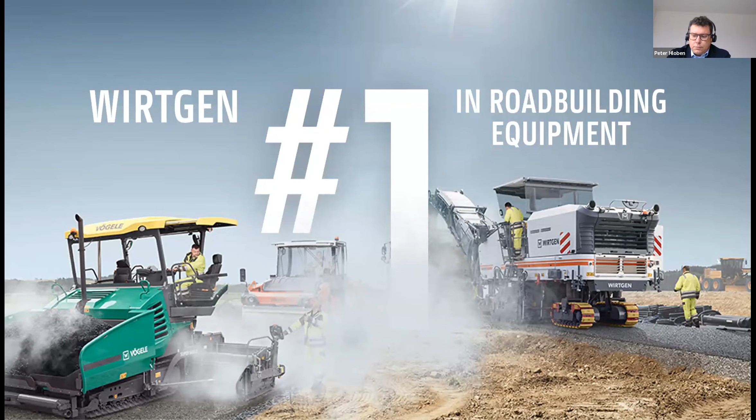We own the Wirtgen company with all 5 brands, like Vogele - this is road equipment. We are also an industry leader in construction equipment, including, as you can see, this loader here.

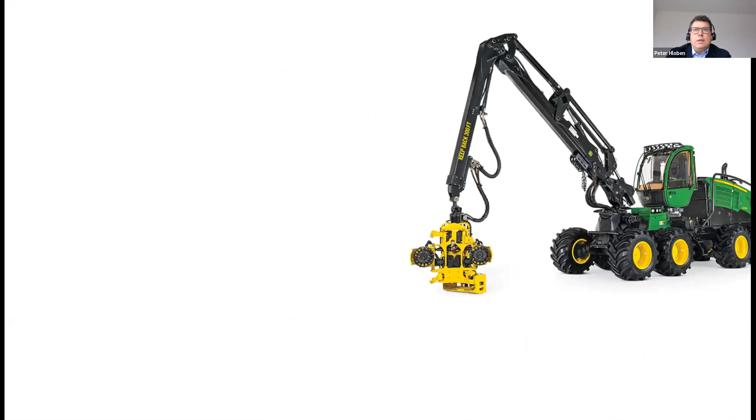We are number one in global forestry equipment. This is a forestry harvester.

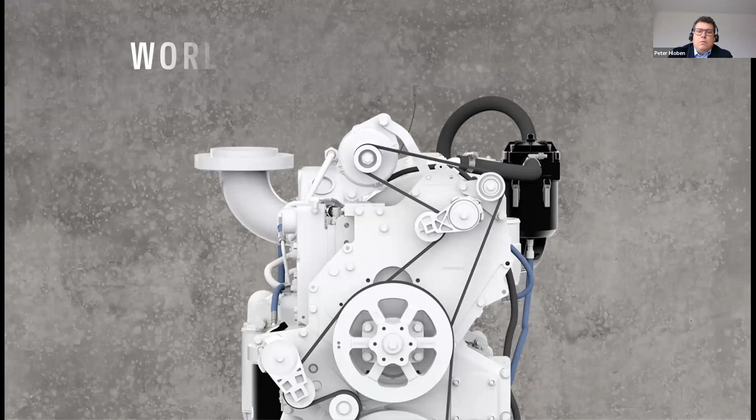We build some of the most reliable and fuel-efficient engines in the world. In fact, John Deere engines are in demand not just for agriculture and construction equipment, but also for marine, forestry, and other equipment around the world.

We are the official PGA Tour supplier with turf equipment, and we build 1 out of every 3 lawn tractors sold in the US.

You can see that we don't just build tractors - we have a very wide range of products. Now I would like to tell you about our operating model.

John Deere introduced a new strategy in 2020, very recently, which is split into three organizational platforms.

The first is production systems - this is how our customers get work done through a series of steps in their output, so that we can gain a deep understanding of customer production systems, their needs, and their costs.

We can include, for example, what I will speak on later in detail - one specific production system where we can supply him the complete chain of technology that he needs for his job.

This allows us to supply the complete chain of technology that the customer needs for his job.

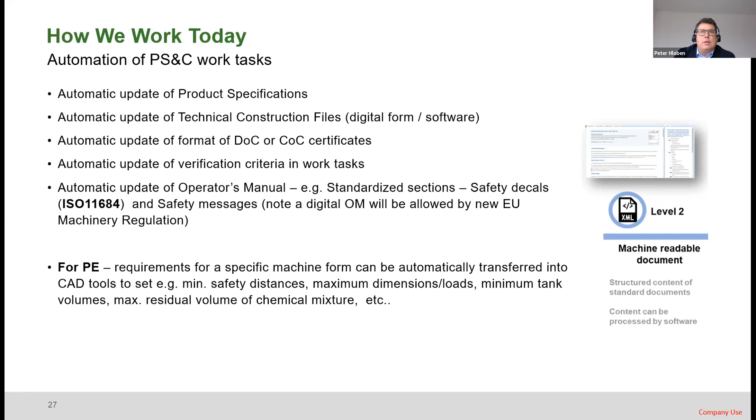So that could be transferred to PE in the CAD tools, so they automatically won't be allowed to design across the set boundaries. Nevertheless, I understand this might not be state of the art for our company yet. In some other industries this is already state of the art, with business models or tools available for automatic recording, for example, of technical construction files. But this is still not widely spread in the industry.

So the message here on these first two levels, regarding the use of the level 2 standards on a daily basis, would already be a huge step for most ag technology companies, if we come to that level.

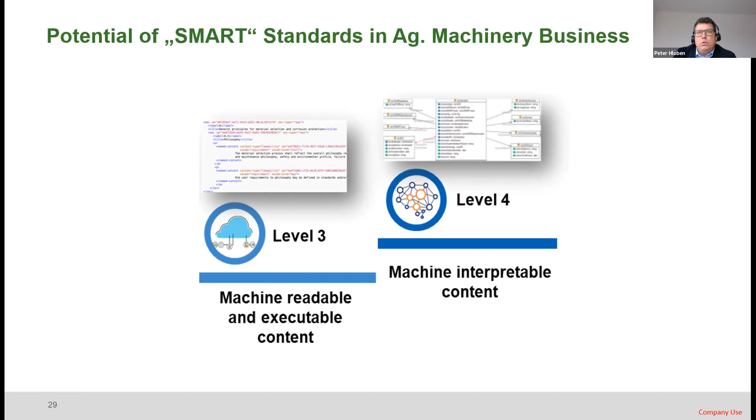Let's go to levels 3 and 4 and the business cases. This is what you are most likely looking for from me today. Before I go to the business cases, I would like to highlight something.

What is the main motivation for these business cases? I work for the Crop Care platform, which deals mostly with pesticide application, so with sprayers, field sprayers. This is at the moment very high on the scope of the Green Deal agenda of the European Union.

The plan is to reduce dependency on pesticides and antimicrobials, reduce excess fertilization, and there are concrete targets set up by the authorities, the government, the EU Commission: they want to reduce the overall use of chemical pesticides by 50%, reduce use of the more hazardous pesticides by 50%, and reduce fertilizer use by at least 20%.

So this may be linked to what Mr. Winterhartel said, that this is probably the unpleasant way we need to react with standards to regulation. This is the case where we need to come up with new standards, where we are forced to set higher requirements with existing standards, but also develop new standards which are not yet there or not yet needed. I will speak about that in a few seconds.

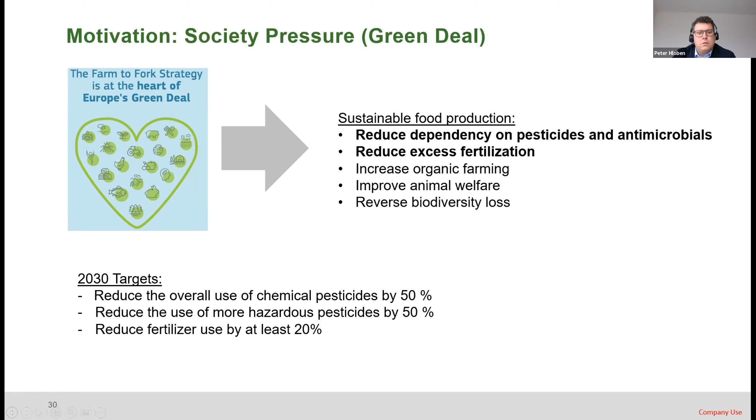So what is the Green Deal? Overall you can see one big trend: there is a demand for data, a demand for application data. The EU Commission and member state authorities, so it's not only the EU Commission but it comes from the member states too, all the regulation and new requirements, they would like to gather reliable information about the total amount of applied pesticides.

They would like to ensure that only approved plant protection products, PPP, are applied in the right manner, in the right place, in the right dose. And they want to ensure that the spray application parameters are correctly used, automatically adjusted according to approved operating conditions for each PPP.

Here I need to say that the regulation is that every chemical product, so we're speaking about pesticides, must first be approved on the EU level for the active ingredients, and then it goes to the next round and is approved on the member states level. The member states approve the formulation, and they can also approve the conditions under which the PPP can be applied.

So that could be, for example, that you can only use a certain range of spray pressure in the nozzles, you can only use a certain volume per hectare, you can use a certain height of the nozzle above the ground to avoid, for example, emissions into the environment.

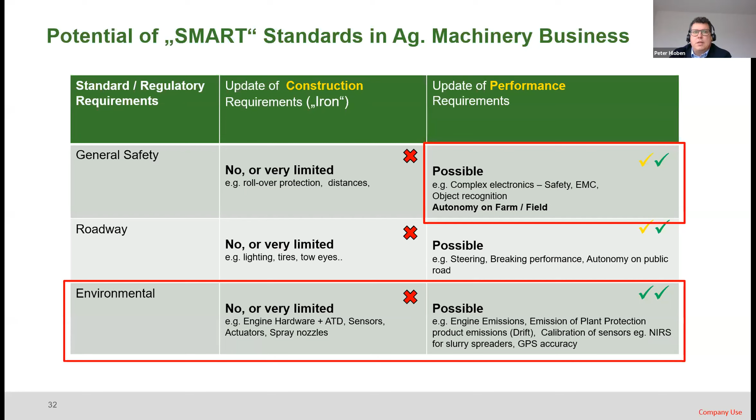You can recalibrate your sensors - I will bring the example of the slurry spreaders. GPS accuracy you can also probably change by software. So I highlight in red here the areas where we see the biggest potential for smart standards in the agriculture sector.

Example on field sprayers: construction requirements and test methods, which are also part of the standards, are also very hard to get into smart standards and change during the lifetime of the machine. The group on the right hand side is really the distribution performance - example on distribution performance on sprayers, where you can change the GNSS accuracy, spray pressure, boom height steadiness, forward speed, nozzle type.

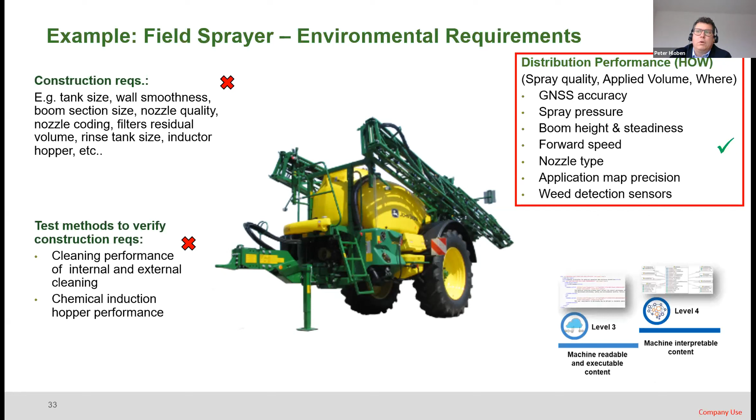Application map precision, weed detection sensors - all there we see a potential for the smart level 3 or 4 standards.

Level 3 is about drift, as I said. You can see on the picture what drift means - this cloud of small droplets of the chemical mixture, which should be applied just on the plant, is drifted by the wind outside of the target area. The regulatory bodies foresee that this is of course not acceptable, and they would like to regulate the conditions under which you apply the chemicals, so that by reducing the pressure, reducing the boom height, and reducing the speed, you can reduce this drift by 99%, so there is almost no drift.

Here is an example of a project which we run together with CropLife EU, a European Association of Chemical Produce, or Agriculture Chemical Producers. We are foreseeing a cycle for when the chemical is applied: you first register, then you scan the label on the chemical before or during incorporating the chemical into the sprayer.

Based on the data which you scan in, the machine can download all the conditions under which the chemical can be applied - for example, no spray zones, pressure, boom height, speed - and can automatically adjust the spray condition ongoing. This is step 3 and 4: automatic application in the field. By a standard and regulation defined, the spray conditions for each approved product and culture plant combination will be transferred into the spray controller, and spray conditions will be automatically adjusted once the PPP is loaded to the sprayer tank. This is one great example where you can apply level 3 standards.

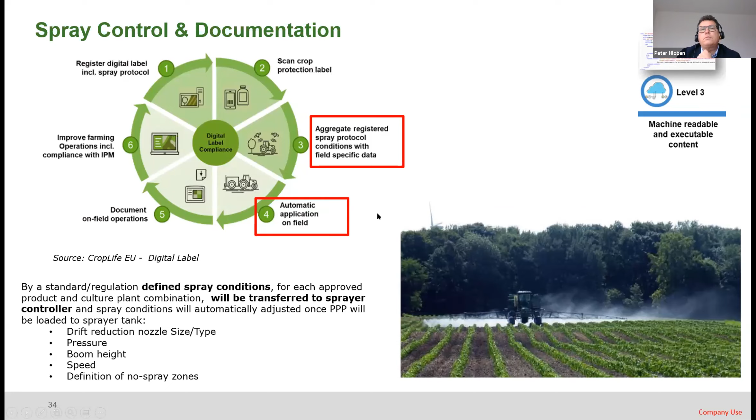This is a bit of a side note. As an industry, we were anticipating this regulatory requirement coming on us, that authorities would like to monitor what the farmer is doing on the field. We decided 1.5 years ago to create a standard which would standardize the parameters that make sense to record, the minimum accuracy we're able to record, and the data logging interval, which is the frequency of the record.

It doesn't make sense to record it every second or every minute, and also the location of the sensors which record this data matters. Then it's a task for another working group to define the formats for transferring the data to the clouds, first to the owner's cloud, because we are very cautious about data privacy, that the farmer is the owner of the data every time. He or she can provide the data to the authority just on request, in case of inspection for example, or to another third party or farm management system. So this is an example of anticipating such a regulation, which we are forwarding and preparing as an industry standard.

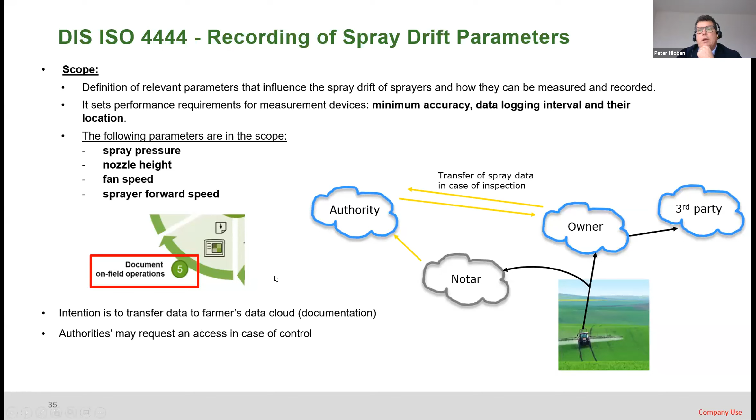Another example where level 3 is improving is application map precision, using GNSS, global positioning systems. You can standardize application maps which can be shared, standardize no-spray zones, which can be shared among users.

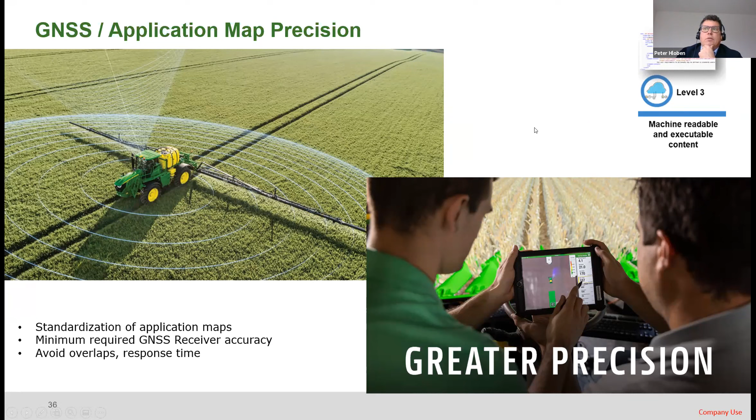Another example is the minimum required GNSS receiver accuracy, which you can change online just by updating the software. This allows the application maps to reduce overlap, so when you're turning on the corner conditions of the field, you don't spray twice on one spot. And of course you can improve the response times of the system overall. This is again an example for level 3 machine readable executable content.

Regarding level 4, this is more complicated, of course. Machine learning comes into play. Nowadays I think this is already state of the art on our tractors and equipment, so you have self-driving equipment. This is not autonomous driving, you still have an operator in the cab, but using a sensor-based camera vision system or a row vision system, the farmer doesn't have to really hold the steering wheel when driving across the field.

So that's all automated. He can turn on the headlands, meaning at the end of the field he can interrupt the system and make the turn himself, then activate the system again and drive straight for miles in some regions. But as I mentioned, we're also preparing programs. You can see on the right-hand side here an autonomous sprayer, without any operator, without any cab.

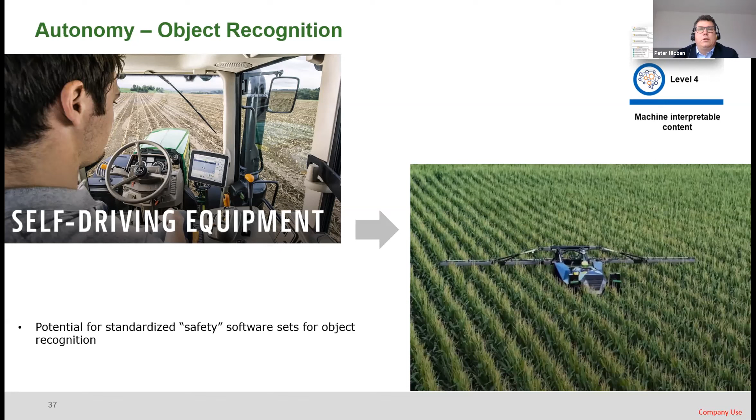There I see potential, generally for every piece of equipment, for standardized safety software, for example for object recognition, so we can gather information about all the projects. Nowadays every company does this by itself, it's part of their know-how. So there's a question about how the know-how or IP could be shared. But it would make great sense if we could get standardized object recognition software shared at the ISO level, which would save costs, of course.

Another example of level 4 standards would be for weed recognition. Nowadays we are able to recognize different types of weed species in the field. We can distinguish the weed from the crop plant and spray only the weed itself, hitting it with amazing accuracy. This is also based on machine learning, so with every pass across the field the system learns what kind of weed is there, what the level of infestation is, and learns the new shape of the weed, adding it to the database.

So the question is, can we have in the future a standardized shape recognition for weeds? Again, a potential, but here I would say there's an IP issue, probably a conflict around know-how protection, because some companies are investing in this now, and only in later years will it get standardized. But maybe this is another example of what level 4 standards could look like.

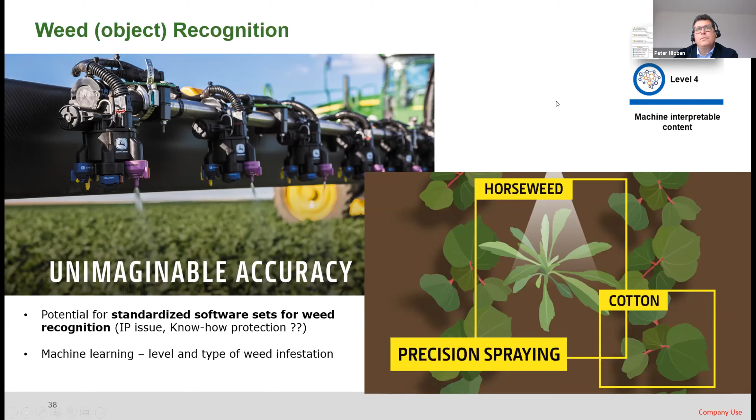Finally, another case, also linked to the environment, is online determination of nutrient content of slurry. Slurry is a liquid fertilizer coming from animals. Nowadays there is an issue with over-application of slurry in European fields, but not only European fields. We are looking at ways to improve the situation.

There are projects related to near infrared sensors which can determine exactly the NPK content in slurry, the chemical compounds. Since slurry is not a homogeneous liquid, depending on the content from each bulk in the tank, you can precisely control the application rate so you don't over-apply these essential chemicals into agriculture fields.

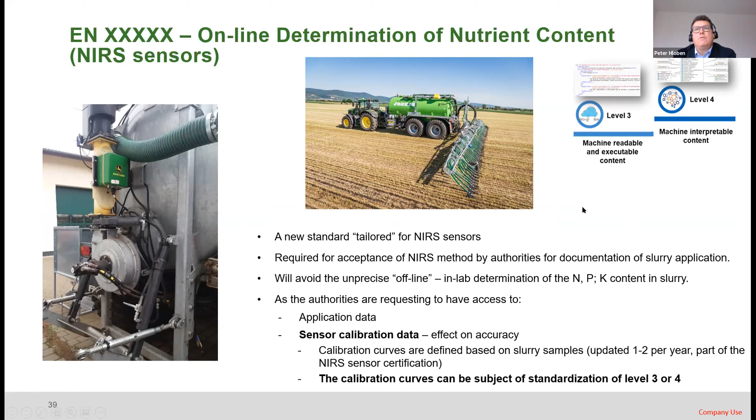I mentioned level 3 and 4. It could also be level 4, because the sensors can send back the data they get, and could also maybe in the future become a self-learning system. That's why I mentioned level 4.

Some partners: NEN is the Dutch partner for agricultural standards, and we are cooperating there to develop a new standard. It will be at an EN level, since the need is currently mostly on the EU side. We have the most environmental pressure there, and that's why it's developed under EN.

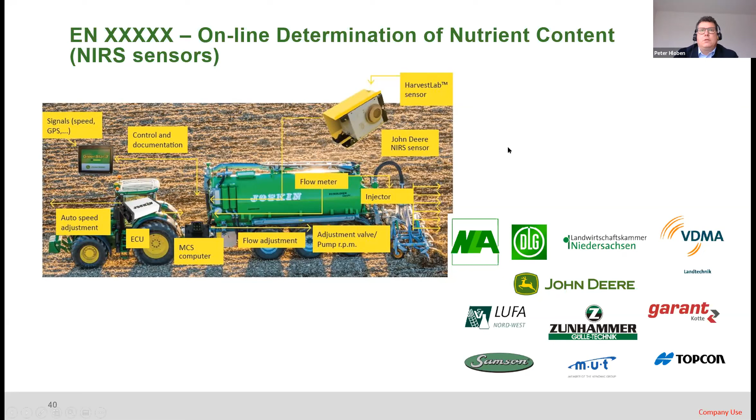Thank you, Peter, very interesting presentation. Thank you very much. I think we're a little bit behind schedule. I would just like to... am I muted? Sorry, I just wanted to say thank you very much, Peter. We will have some time for discussion at the end. I just wanted to ask you one question coming up in the chat as well.

You're apparently familiar with the levels of smart standards as we described them in level 2, 3, and 4. Have you had any contact with standardization organizations looking at understanding user needs and trying to translate these needs into the question of how to build smart standards, for example through any user group that NEN is organizing, or anything like this?

Not yet, to be honest. It was pretty much new information for us. However, I'm in contact with Jo Collins, and she invited me to join one of the groups, either the EN or the DIN group, which are dealing with this issue, with this topic. So maybe there we will have a chance to get into contact and discuss the cases, or participate in one of the case studies you would have.

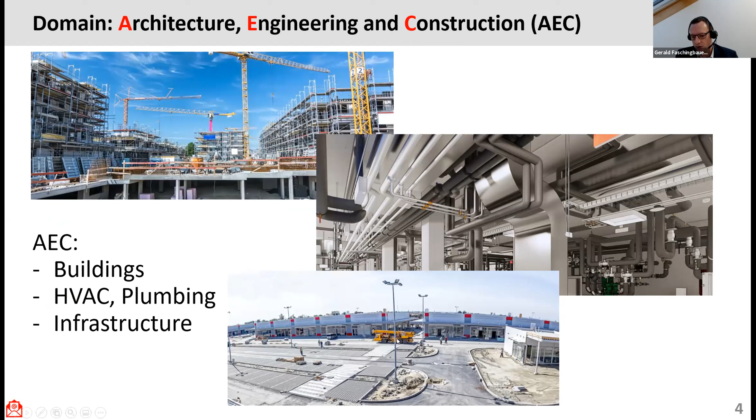To make it clearer which field we operate in, the domain is architecture, engineering, and construction, for buildings, heating, ventilating, air conditioning, plumbing, or also infrastructure projects. Our main objective is to enable users to make bill of quantities for construction contracts. A bill of quantities is an important part of a construction project; it formulates the details and terms and conditions in the form of work items. So in such a bill of quantities you have many different work items formulating the terms and conditions of the project, and it varies from project to project. It is used in tendering and in assignment.

The standardization aspect we focus on is standardized specification texts. The viewpoint is that each contractor should understand the texts in the same way, and the text should fit the current norms and standards in architecture, engineering, and construction. So the standardization context here is these texts.

The challenge is that you can have billions of different text variations. Think about how many materials exist in the world, how you can build, or how many different trades you have in a construction project—you have walls, windows, floors, and many different trades in a project. So the challenge is how to handle billions of different text variations.

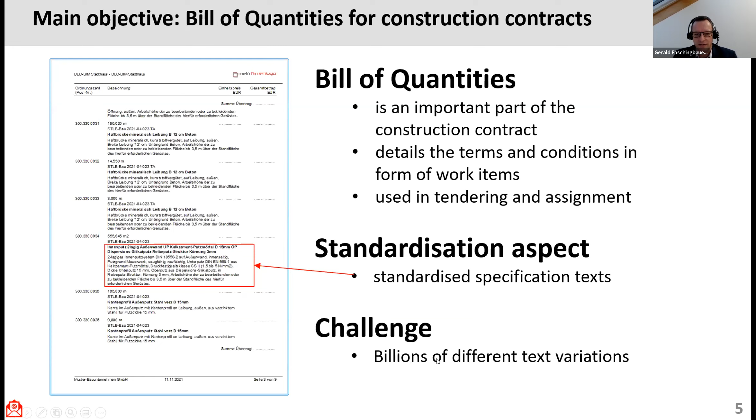This is solved by combining standardization and software. The STLB-Bau has model-based specification texts—you don't have ready-made text, you have a system which configures the text using logical rules. I think the best way is to show that live, so I hope it all works with the live presentation. I hope you can still see it.

Sebastian, can you see it? Yes, we do, Gerald. Okay, thank you so much.

So you have here the system, and here we have the trades. Unfortunately it's in German, so I'm sorry not everybody can understand it, but I will say a few words about it. You have here a lot of standardization, a specification text. You can go through this folder structure, and I will show it in the example of a window made of wood.

So now here I get a specification text, but this text is not a static text. This text is standardized dynamically. So I can here choose, based on these properties, other options. If I change here anything, the text will also change.

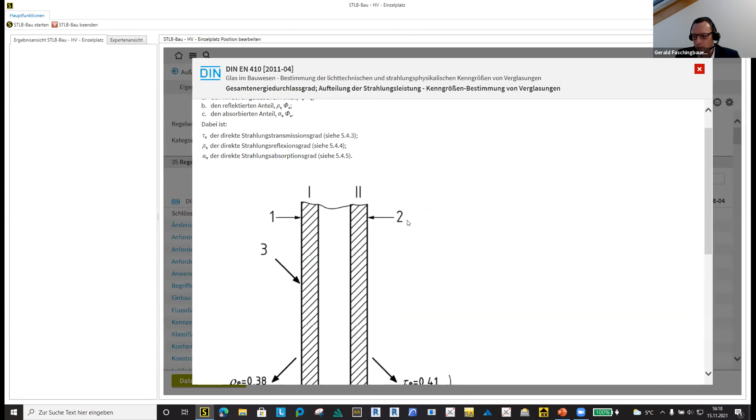And you see here also this DIN sign. If you click on this DIN sign, you see the relevant norms according to this specification text. So you have a context-sensitive filter for applicable norms and standards, linked here with this system. You can also go into parts of the standards appropriate for any problem - these are directly linked in the text.

So if I have the question, what is this Beanspruchungsgruppe? What is meant here with this term? I look in the special norm and I see the definition of this property.

This helps the user, and here again the viewpoint of the user is important. That is, I think, what Christoph Winterhalter said in his speech today - the user is the important thing. This helps the user with the standard, to look in the standard and make his specification text in the right manner.

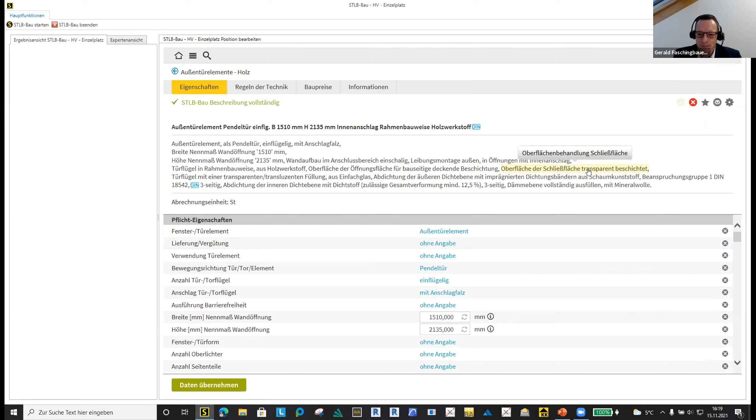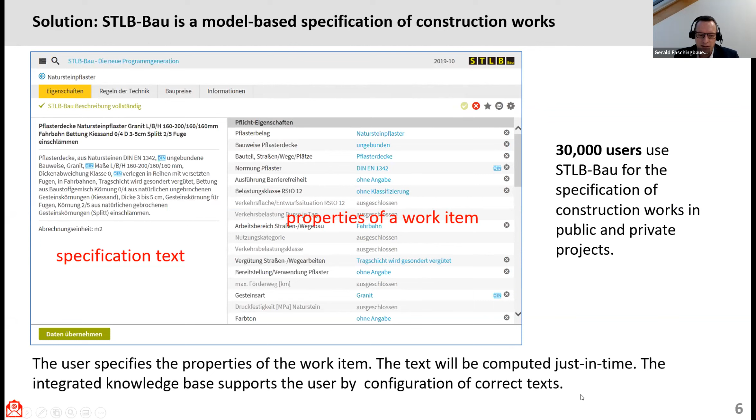So we'll go back here into my presentation. This way of configuring texts is used by about 30,000 users of the STLB BAU, who use it for public and also private projects. The users specify the properties, and the text will be computed just in time. So the texts are not stored; the rules, configuration rules, and basic content are stored in the database, and the rest is computed live.

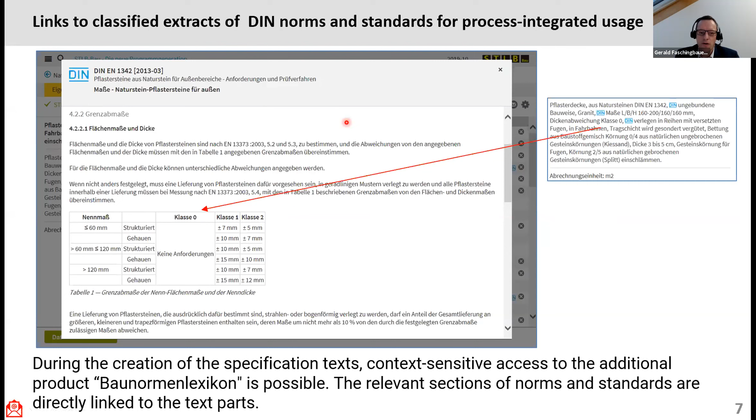That I have also already shown. The norms and standards are directly linked to the text and can be used in the context of the work, directly in the process. So the question is, if this is a digital standard, how can you use it?

The use of this standard will, of course, be done by software application. So this standard is a software in itself, but it's also directly integrated in other software applications. If you have a software application for tendering, awarding, invoicing, and so on, this application can access the standard STLB BAU via an API.

You have seen the user interface - it's the same in each software application. So if this is a software application, this user interface is directly integrated into the other software application, and the data will be communicated via an API. So each software application can integrate this solution and therewith use the standardized text.

And the big advantage of this is that not every software has to focus on the logical restrictions within the data. The specification texts will be provided as a kind of service, and software applications can use this service.

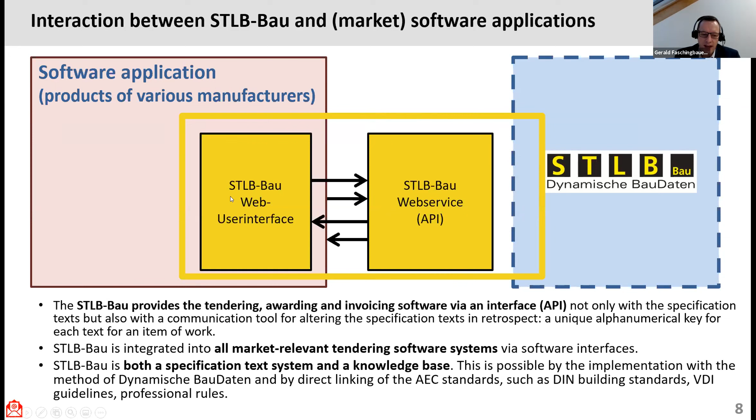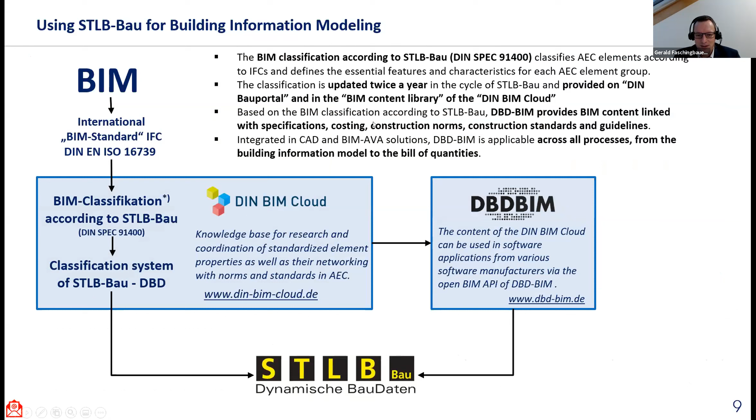This is meanwhile also used for building information modeling. Herewith you have integrated systems where you have models of a building - maybe it's not good to talk so much theoretically, I will also show a few examples.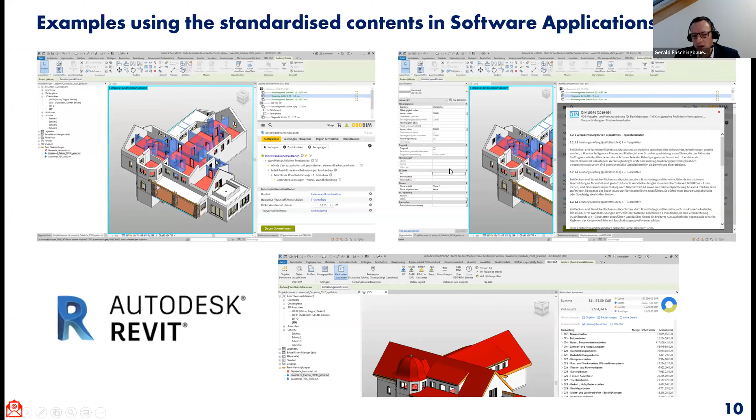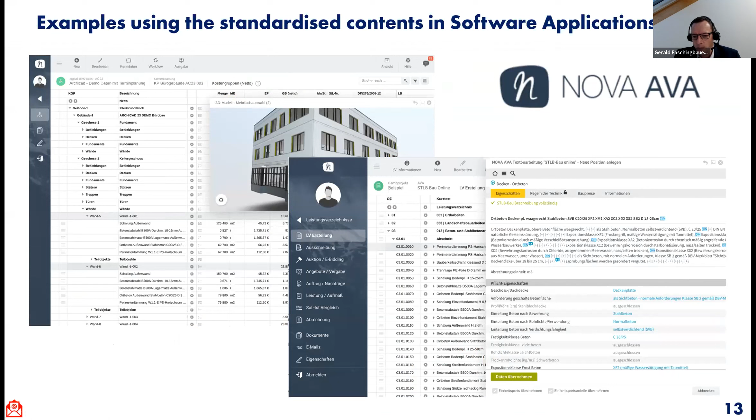So if you have a software where you make a model of a building, then you can specify the model elements. In the end, again in a lot of different software products, you have a link to the STLB BAU. You get the ready-to-use texts for specification, and therewith you can make bills of quantities in different software solutions. So the standard itself is a kind of software, as you see here, and it is directly connected and integrated into other software.

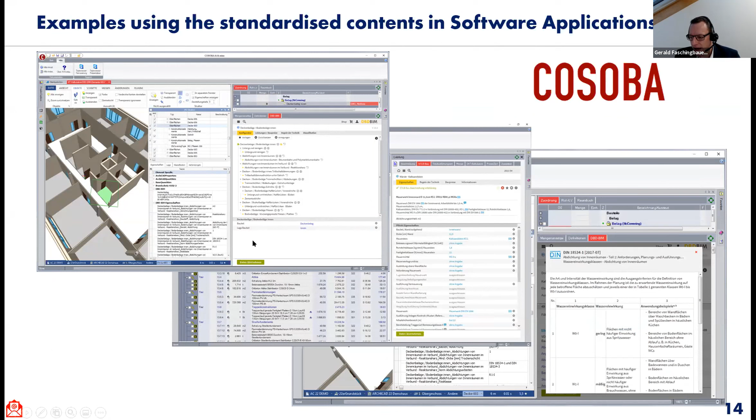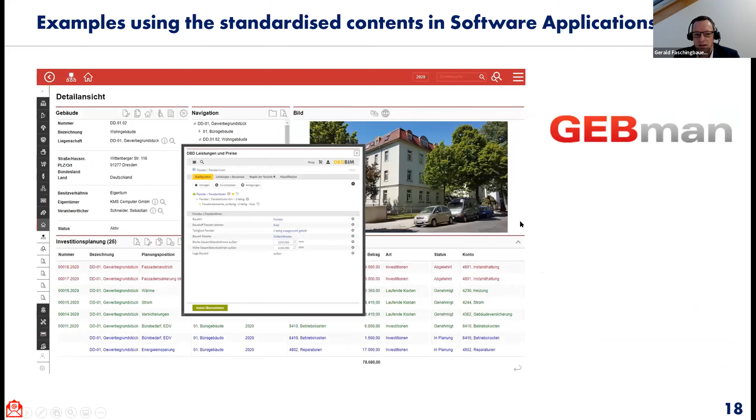Access to the DIN norms is in each case possible, so the DIN norms are directly linked to the standard. I don't know how many applications already integrated it, but it is a lot.

So what is, from our point of view, the big change? The big change, not only for this example but maybe for a number of additional examples, will be that we come from readable norms and standards to executable norms and standards. The addition we have to do is you need software components as part of the standard.

In this case of STLB-Bau, this is done with three different competences which are combined here. We have the standardization competence of DIN, we have the domain competence, and we have IT competence. And what you see here is each partner involved in this project has to have a little of the competences of the other.

So we have to know a little bit about standardization, and we have to know a little bit about the construction domain too. The same here: DIN of course has standardization competence, but also needs a little domain competence and some IT competence. The same for the GAEB.

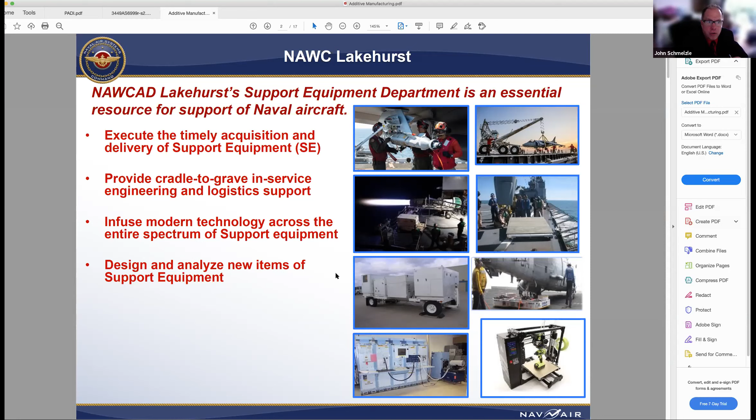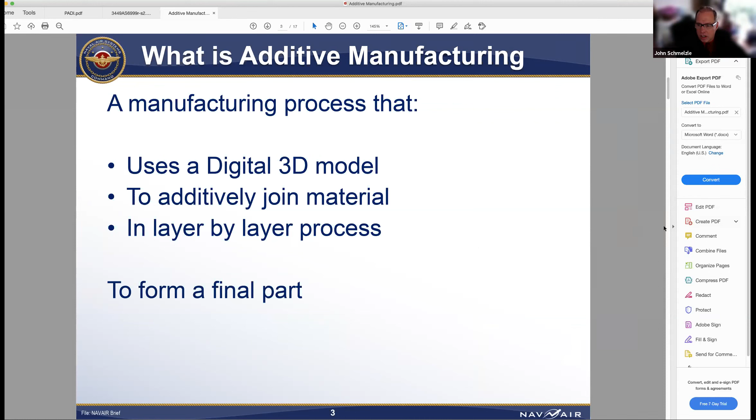So real quick, what is additive manufacturing? I thought I would discuss this quickly. It's a manufacturing process that uses a digital 3D model to additively join material in a layer by layer process to form a final part. That's the fundamental definition put out by ASTM, that standard organization, and it's a definition that's been pretty much accepted around the world. There are 7 types.

There's sheet lamination, vat photopolymerization, material jetting, binder jetting, material extrusion, powder bed fusion, and directed energy deposition. So all this 3D printing falls into these 7 different types, and they all have their own unique capabilities, advantages, and disadvantages. Real quick, just to discuss advantages of additive manufacturing. I know a lot of people hear a lot about 3D printing in the news, and why do we use 3D printing?

3D printing provides certain capabilities that we never had before. One, you can 3D print very unique organic shapes. In traditional manufacturing, we always try to design parts based on the manufacturing process we're going to use, and that puts a lot of constraints on the design engineer because they have to take into account that somebody has to make this. In additive manufacturing, you take away a lot of those constraints. I always like to say the one constraint we place on those design engineers is the limit of their imagination. You can print so many different things.

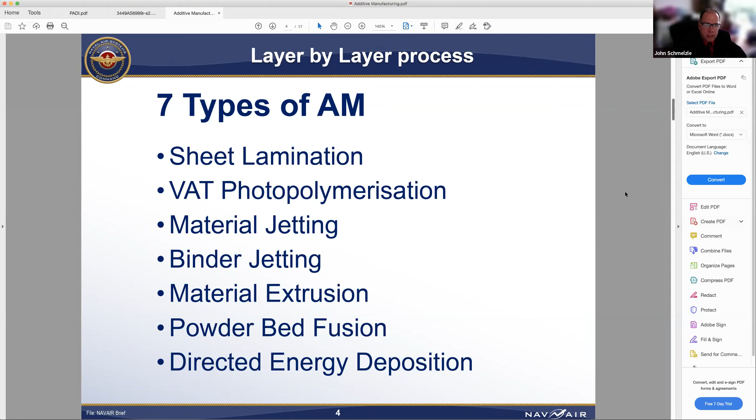One of the things I was asked to talk about was the ANSI gap analysis that was done. America Makes, which is an additive manufacturing organization, and ANSI, which is more of a standards oversight organization, put together this collaborative initiative with industry to look at all the standards that exist right now, and then look at all the standards additive manufacturing requires for it to be a truly full process, and identify what those gaps were.

From my perspective, I not only participated in this, I actually led one of the subcommittees for design of additive manufacturing. We looked at all those standards and said, okay, what do we need from these standard organizations to get us to the point where we can implement additive manufacturing worldwide. So that was a big initiative, and a lot of good has come out of that. A lot of standards have been updated, and a lot of initiatives to make new standards have pushed forward. So we are getting there, I guess is where I'm going with that.

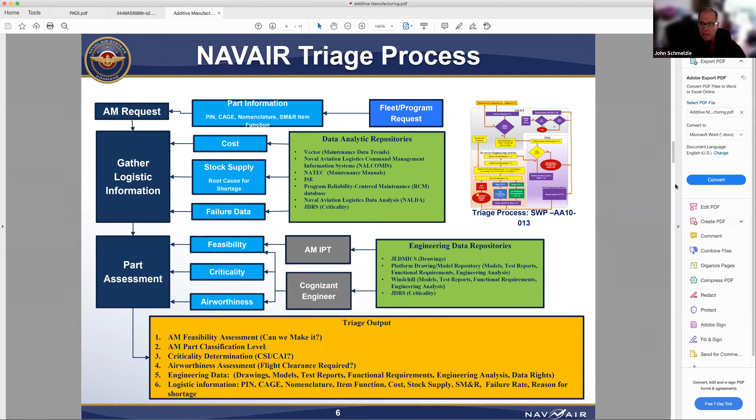So that was something we did in NavAir, that we had a discussion with industry about — part classification, here you can see it. I'm actually leading this committee because there was a lot of interest in industry about what NavAir did. Other DoD agencies did similar things, and a lot of our industry partners also did the same concept — the idea of classifying these parts, putting together a standard of where these parts would lay based on their consequence of failure.

Based on where those parts fall, that would then dictate how other standards would handle them. So you could have an NDI standard that might call out the part classification differently — if it's a class 4 part, require certain things, where if it's a class 2 part, require other things. I'll discuss this a bit more when I talk about our technical data packages, which I'm going to get into now. A technical data package, that's a military term, but basically it's the authoritative technical description of an item.

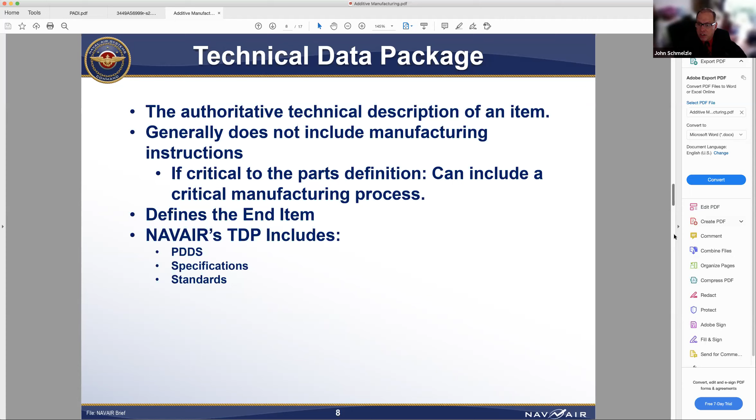This is really your drawing package. We did a lot at Lakehurst regarding technical data packages, not just for additive manufacturing, but for a model-based initiative. This is really AM and traditional manufacturing where we moved into this, but it really does apply a lot to AM because AM really requires that model. You need the model to print. Without it, you're nowhere. So we actually require a model-based definition package, technical data package for all our additive manufacturing parts.

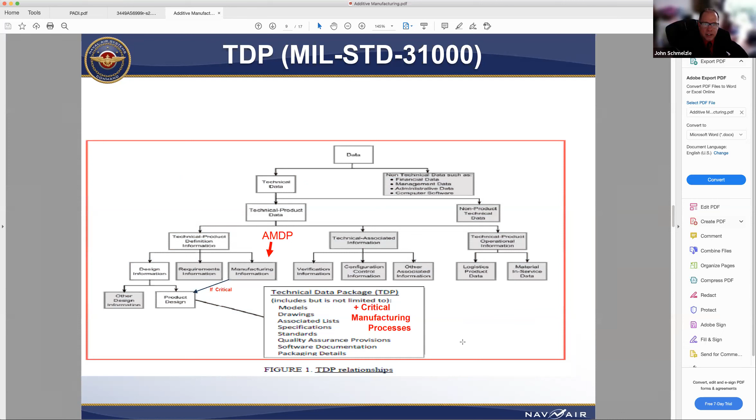What does a technical data package include? It includes your models, your drawings, associated lists, standards, quality assurance provisions. It also includes critical manufacturing processes, which I'll talk about in a bit, because this box here comes out of MIL Standard 31000. It talks about product design. It doesn't really talk about manufacturing information, but that's actually a manufacturing document that we include into the technical data package. It's kind of an example of a structure we might have for a technical data package.

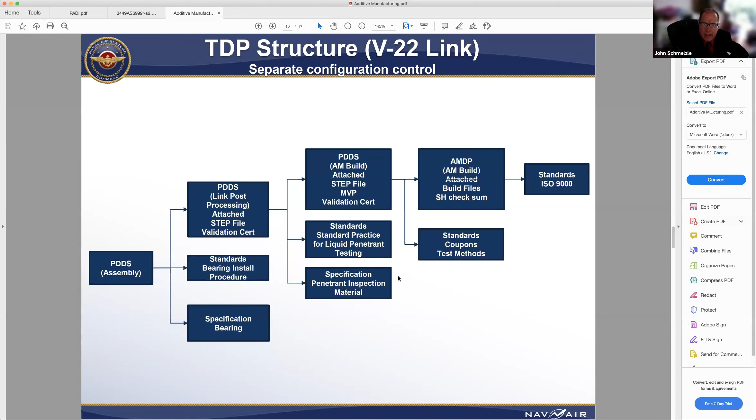PDDS, just to elaborate what that is, it's a product definition data set. It's basically a 3D drawing, and I'll talk about that in a bit more detail shortly. You'd have different PDDSs, and these different 3D drawings would call out different standards. So you basically have a package of documents that make up this technical data package.

This additive manufacturing process description is a new document that we created. This is where we talk about not just what the final product should look like, but how to make it. And this really ties back to that part classification, because we're only going to tell you how to make it if it's really critical that we tell you how. Ideally, I would just tell you what the end item is and not tell the manufacturer how to do his job, because I don't want to do that. But based on the technical maturity of additive manufacturing, we feel that in some instances, if parts are really critical, we really need to put that 'how to make it' also in the technical data package.

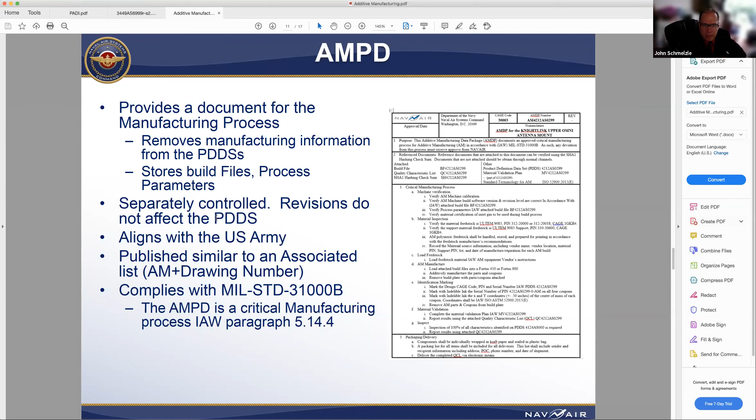So looking at the technical data package and part classification, we have that qualification level, which is the part classification level. It has 4 levels, and it will determine how we put together this technical data package—whether we have this process document, which is required in level 3 and level 4. In a level 1 or level 2, we might have it, but it's not required. It's basically a document to help our organic fleet people make the part, but it's not something we would ever put on a contract. So this is an example of how we use that part classification in a downstream process, in our technical data package process.

Another way we use it is how we qualify vendors. A vendor might be qualified to make a level 4 part, or they might be qualified just to make level 1 and 2 parts, right? Because based on that part, our vendor qualification goes back to that standard that we implemented.

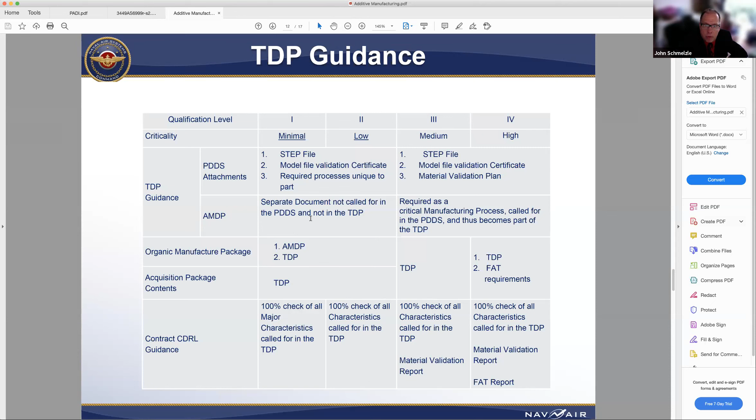So I'm going to talk a little bit about this model-based definition, 3D PDF, product definition data set that we call the 3D drawing. Why did we go to a 3D PDF? This was a debate—I wrote a paper about this. It's a neutral file format. We want everything to be neutral. We don't want to be tied to any specific CAD manufacturer. I know it might be unrealistic to think a CAD manufacturer might go out of business, but that's certainly possible, which would lead us to fundamental problems.

One CAD manufacturer did actually not make their software downward compatible. So if you got up to version 4, you were okay, but then when you went to version 5, you no longer could look at anything used in version 4. So we don't want to be tied to a proprietary format on our technical data. That's why we love the idea of 3D PDF being a neutral format.

A lot of people think PDF is an Adobe format. Not true—used to be an Adobe format, but PDF is actually made to an ISO standard now. We make our technical data packages in accordance with ASME Y14.41, a standard that governs product definition data sets—again, 3D drawings. PDF is readily readable; almost everybody has an Adobe reader on their computer. It's compatible with JEDMICS. Another nice thing about PDF is you can embed things into it, so we embed a step file, which is compatible with our computer-aided manufacturing processes. It also provides us long-term archiving capability, which is very important for us.

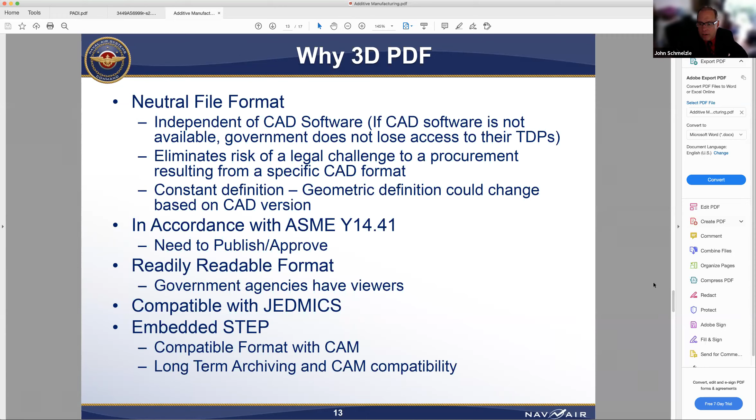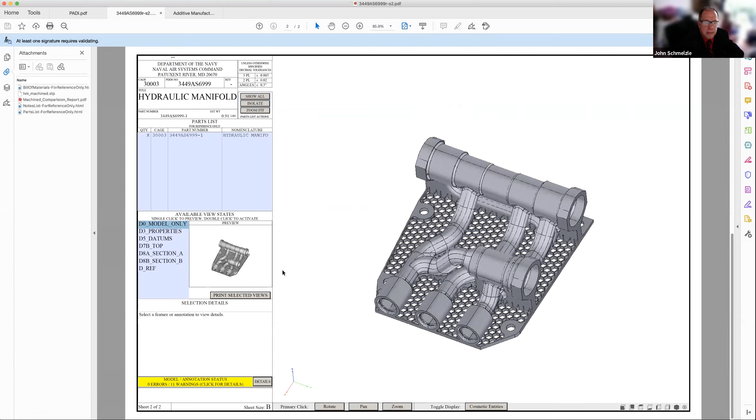When we go to the second sheet here, we see a model that I can turn around and look at, it has different views, and we have sections in here, and you can see the sections with all the dimensions.

One of the things with these dimensions, like I said, I can twirl it, I can make cuts in it. All these dimensions are semantic. So when I take this part, I can input it directly into our computer-aided manufacturing processes and they can manufacture this part. I can put this part onto a CMM machine, a coordinate measuring machine, and the machine will interpret all these dimensions, all these tolerances, and inspect the part seamlessly. The user doesn't have to input any of the data. Matter of fact, the inspection process, the program for the inspection process can be fully automated. So we can divorce ourselves of a lot of this labor because all this information is semantic. It's all embedded into the 3D PDF.

There's a lot of other information embedded into the 3D PDF. I mean, that is all semantic. A lot of that information, all the specifications, the feedstock requirements, and part classification, it's all semantically embedded into this file. So this is basically a full model-based definition approach to our parts, and this is what we're really looking at going to.

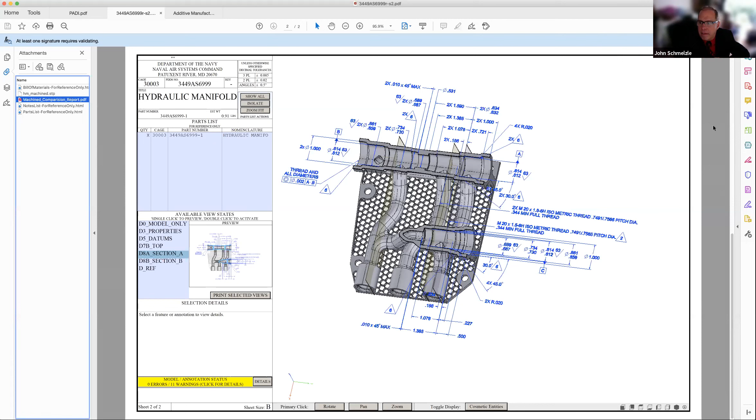There is a translation. In this report, we govern that the translation must be within 1/10 of the smallest tolerance of the drawing. That comes from the gauge spec. So you have all this information, and again, this is that smart idea of having all this semantic information available to the machinist, where it can all be pulled in. They don't have to do all this programming themselves.

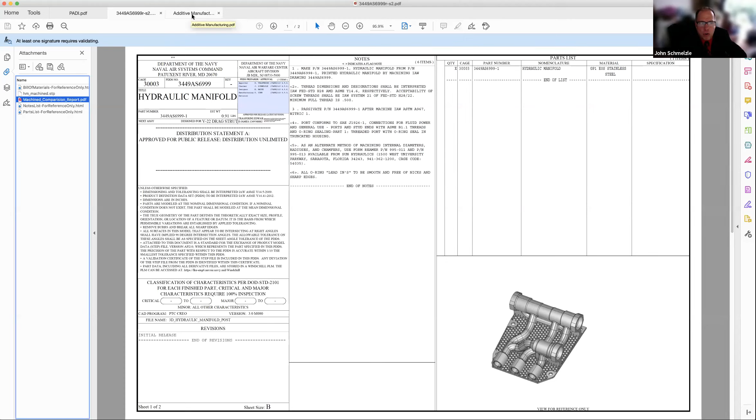Moving forward, 3D PDF - I was asked to discuss what we need from the standards. We work with a lot of the standards organizations. It's something that we truly want to leverage, so we do that. But many in additive manufacturing, because it's so new, a lot of organizations start off with guidance documents. I don't know how many times I've seen this, where they think they're going to do a standard and then decide, well, we'll start out and release a guidance document. Guidance documents do very little for me. It's great for a manufacturer who may want to look at best practices, but I need something I can put on a contract. I need the shalls, not something a manufacturer should do, but he shall do it, and he needs to meet that requirement.

We need to fill in the gaps from that ANSI analysis, that gap analysis. That's another thing NAVAIR needs. We help put together that gap analysis along with the rest of industry. And one of the things I will say, NAVAIR works with these standard organizations to produce these documents, and we do truly leverage these documents.

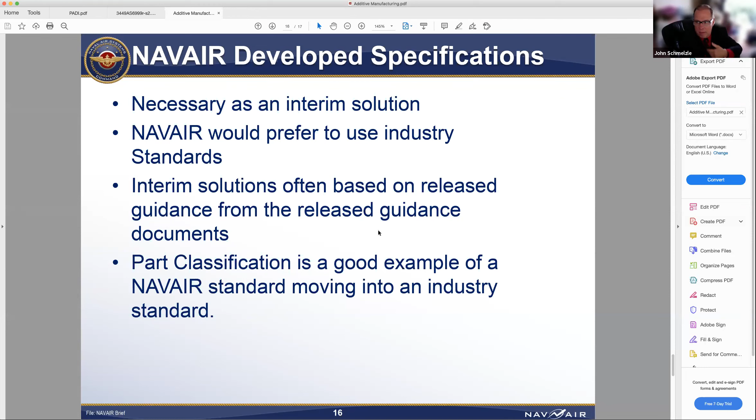So I'm going to close real quick with where our vision is. As I said before, we are deploying printers to the fleet. We are going to populate the aircraft carriers with these printers. The idea is we can ship electrons, not parts. We can ship that digital model, and they can make the part on site. From an inventory perspective, it's great. From a logistics perspective, it's great.

The carriers are the ultimate version of a strained supply line. You have a ship out in the middle of the Pacific. They need a part, they can't go across the street to Walmart or anything. So this is an ideal advantage for us to implement this technology.

We want to leverage our industrial base. We don't necessarily want everything to be — we're not looking to take over manufacturing. Only in some instances do we want to qualify our AM vendors. Most of our manufacturing is done on land sites, so we want to leverage those vendors. We want to qualify them based on those part classifications.

The other thing is we want to continue the research. We do a lot of research into additive manufacturing. Ultimately, we want to increase the technical readiness level of the AM equipment such that it will better meet our needs. So that's my brief, Sebastian.

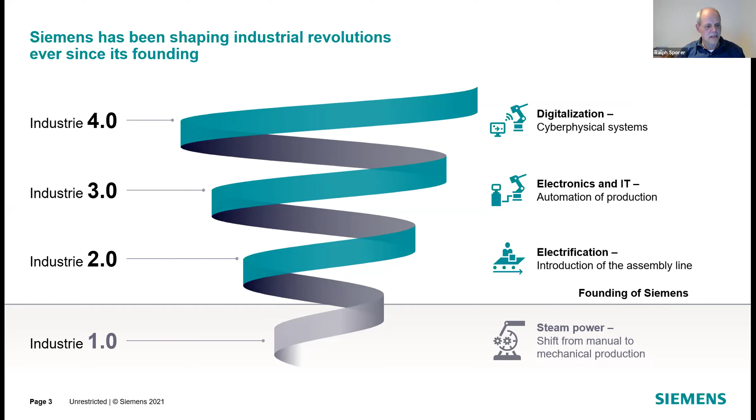I will focus a little bit on the topic of digital twin, because I think that is my connection to the standardization world that I would like to make today.

What that means is basically that we are putting everything that we have from our products when it comes to the manufacturing, the operation, the maintenance, and everything. All this data is put together and made available to our tools and engineering systems by means of a digital twin. And this digital twin is not restricted to data that we as a company own.

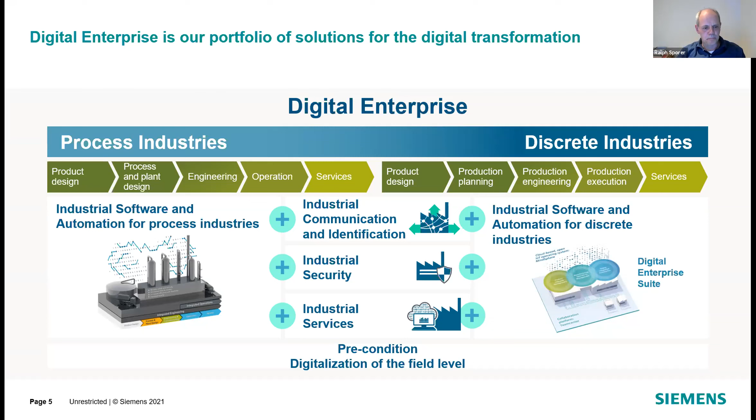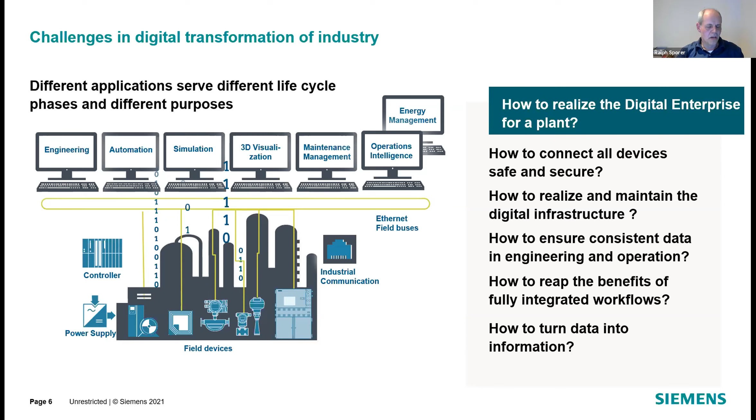That obviously makes it very, very difficult to turn the data that you have, not only from the field devices but also from all your tools, into meaningful information. So that's a picture of yesterday. The next one shows how we are doing this today, making use of all those technologies around IoT, edge, and so on.

Today, basically, we are collecting data from all different kinds of domains, from all different parts of the life cycle, and we are putting it together into one platform. On top of that platform, and on top of all that data, we are developing new applications which can make use of all the different life cycles, the different applications, and the different OT devices in the field. So this is how we do it today. Basically, we are producing a huge data lake, and on top of that data lake we are then providing services. Some of the services are still the same that we provided 15 years ago, with engineering, simulation, 3D visualization.

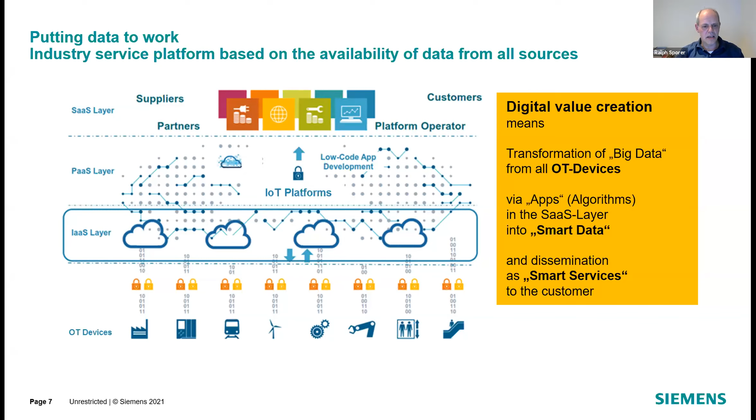But we also have the opportunity to come up with new applications and services which span not only one specific silo, but also use the data from others. So that's where we are today. And that also, as I already indicated, kind of changed the way we are operating with

our suppliers, with our partners, and with our end users. Because obviously, it is not enough that Siemens has access to its own data in its own installations. We also need access to the supplier data. We also need access to our competitors' data that is exposed through field devices in order to utilize that in the applications that we are providing to the end user.

Also for the user, we give them the chance to develop their own services and applications on top of the data that we provide. And that's a big difference because it means that we are not trying to guess the next killer application. We are really giving access to our customers to make optimal use of what we provide to them. And that's a kind of a paradigm change, I must say.

And that's behind this nice term of customer co-creation and stuff and so on. And our CTO, Peter Körte, he has made it very clear. He said, well, today, the main requirement is that we can have access to the data. We need the data available in a format that we can give to our customers so that they can find the best way to make use of that data.

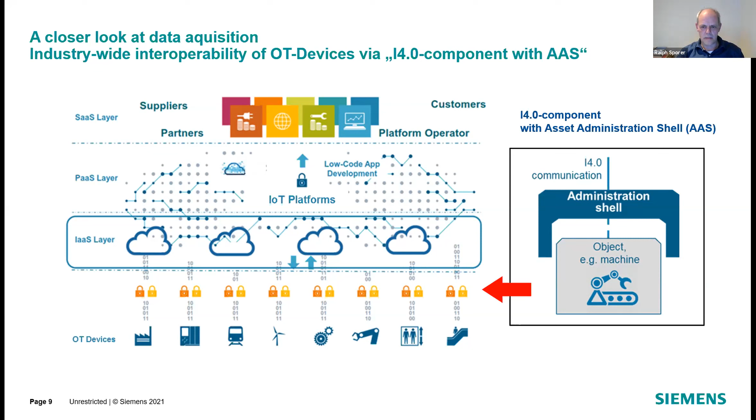Next slide. Please click once more. So a little bit more detail. This administration shell, which is kind of a metadata describing what is below in this model in the asset, really can include a number of submodels, a number of different protocols, a number of different descriptions.

And today we are quite well advanced when it comes to the mechanical description or the electrical description of a certain asset. We are starting to model the functions and capabilities of the asset in order to utilize what I can get from the asset.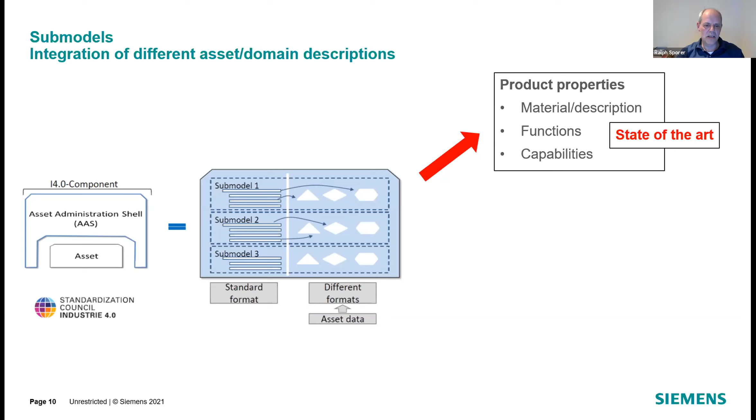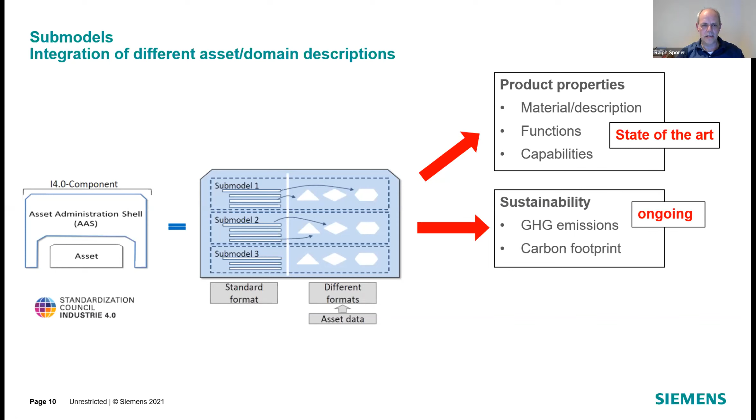Next click, please. But there are new submodels possible. For example, submodels around sustainability, which include information about greenhouse gas emissions, the carbon footprint of your product, and so on and so forth. And this is currently ongoing. And we already talked about the huge regulatory push that we currently see to make this data available.

So next slide. This shows an initiative of the German Electrotechnical Association, ZVEI, in which we try to really have a very good understanding of the carbon footprint of a control cabinet.

If you try to assess that, you find out that less than 10% of the footprint comes from your own activities. More than 90% of the footprint and greenhouse gas emissions come from your suppliers, the ready-made parts you use, and the usage of your product. And of course, this is a huge topic for standardization because we need to use equivalent models, methodologies, and equations to come to these numbers.

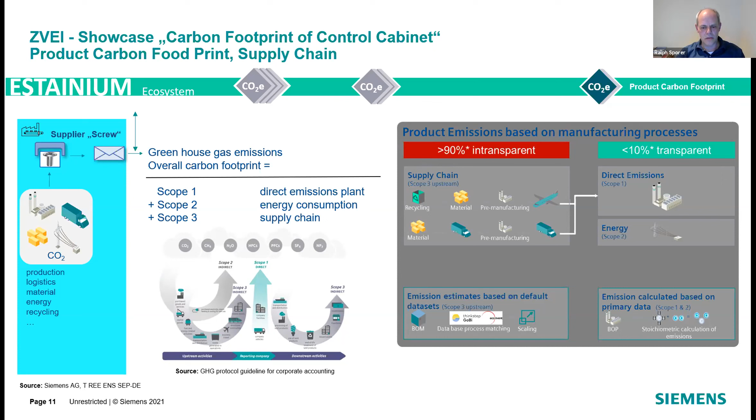But what I want to show with this slide is that it also includes the necessity to have access to this kind of data in a digital format, so that every manufacturer and everyone can use that data based on the same, hopefully international, standards, and that we make that an integral part of the overall data collection of our products, solutions, and applications.

So to summarize where we stand today: at Siemens we use a very data-centric approach in which we try to get all the data that we can get, regardless of what kind of protocols, format, and so on they use, as long as we know what kind of framework, what kind of description, what kind of semantic description of this data is the base, because then we can put it together in our overall data lake, so to speak, and build applications on top.

This is clear: we are not talking about the one world digital twin. There are digital twins for the product, there are digital twins for the performance, and so on and so forth. So there are different parts, but the important thing is that we make them interoperable.

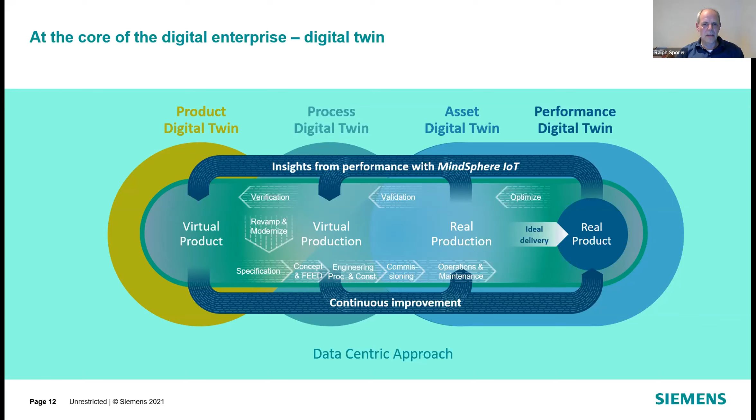I've already shown this, and now I come to the part on standards. Obviously, what we would like to see is that standards are an integral part of this overall digital picture, which means I would like standards in a form that describes requirements, test specifications, and other important parts of the standard in a format that I can describe as a submodel or as part of my overall digital twin.

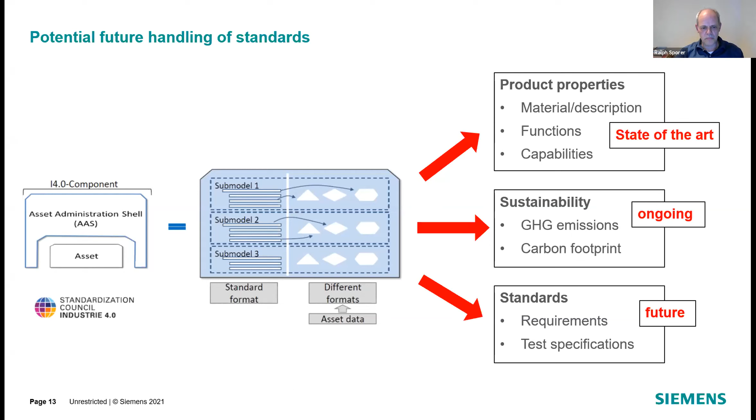That's why, for example, we really like the activities currently ongoing on the CENELEC level on the future of standards, specifically pilot number 5 on the standard information model. This picture, taken from this pilot, already shows that information about standards is provided in a way that I can access it like other repositories and semantic descriptions, whether mechanical, electrical, functional, and so on, and make them an integral part of my asset description, which in turn can be used to produce new services.

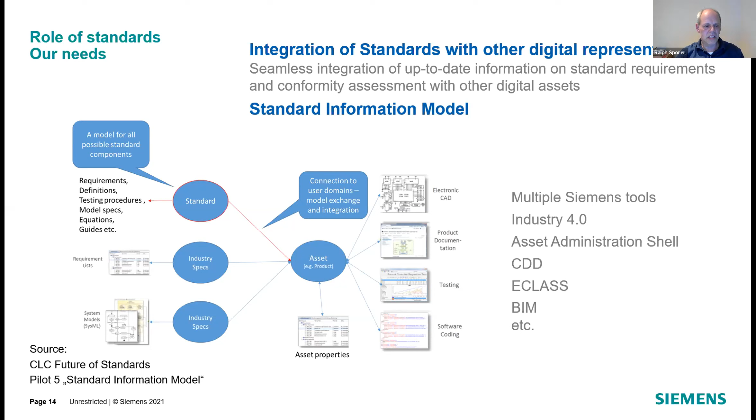The next slide shows a little bit of a different perspective, just an experience from my company background. At Siemens, we are increasing the number of software engineers working for us. Increasingly, this younger generation of people likes to work in environments which have an instant feedback cycle for the things they are currently working on.

So it is relatively hard for us to motivate Siemens employees to participate in standardization. We are not bad at that — we still have a huge number — but it is relatively easy to motivate at least the younger generation to actually participate in open source and Plugfest and these kinds of things. I never heard a problem from a manager saying you can't go to an open source event. We always have to argue about standardization.

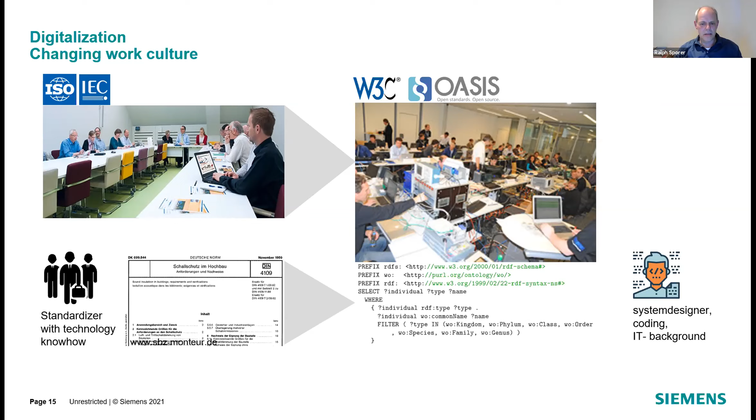And the last two slides come back to my activities, as already mentioned by Sebastian, which are on the German level when it comes to IDiS and the activity of DIN-DKE, but which are also focused on the IEC.

We have introduced a smart standards concept, which we think includes all those elements that would really enable us to meet our requirements by cutting standards into fragments, which we call information units, restoring the context and classification information that is currently contained in the document, through attaching to those information units a kind of functionality or capability, which enables us to represent this data in terms of software executable code.

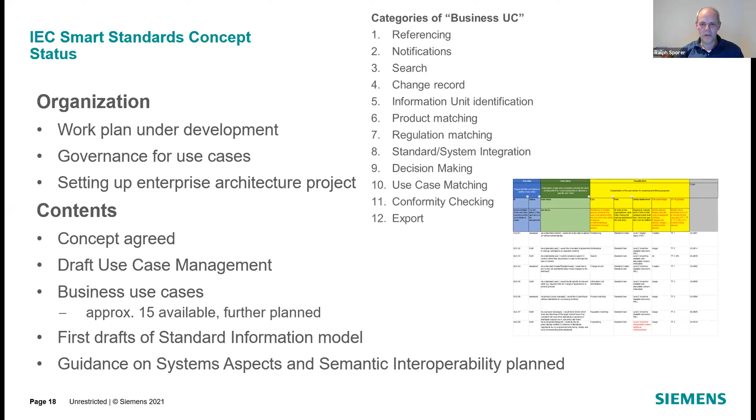Great presentation, really interesting. We have a few comments. First of all, there's one statement - I think you addressed this a little bit with the asset administration shell and the question of how to map to different partial models, but I'll tell the statement from Daniel Prentice, saying there is a need for standardized data as a foundational enabler for the enhancing capabilities you showed, such as the digital twin. There seems to be a lack of discussion on reference data definition across our industry and the need for unification of and adherence to data standards.

I would say we will never be in a situation where we have all the data from all the different domains in the same kind of format. The question is, what kind of necessary preconditions do I need on repositories, on data representation, so that I can make sense of the data coming from industry, from buildings, from transport and so on. What kind of general rules do I need to follow in order to produce semantic interoperability?

This discussion is actually a discussion for the standardization community, because we already have committees in JTC1 which are talking about exactly those preconditions to merge different kinds of repositories and data sources.